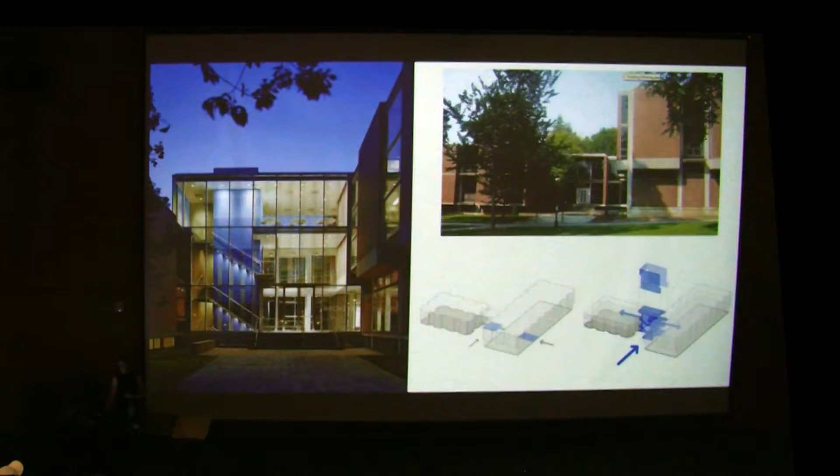This is the School of Architecture at Princeton, and projects in the public realm. This is a renovation addition to the North Pavilion at Union Square Park in Manhattan, New York.

We're committed to a belief that architecture is created out of a deep engagement with our clients and with the context in which their projects occur. The diversity in our work reflects that place, those people, and that client in those contexts.

On a scale of small and big, both in project types and also in terms of sustainability, is that stretch? It's okay, sorry, I'm just realizing the proportion is off.

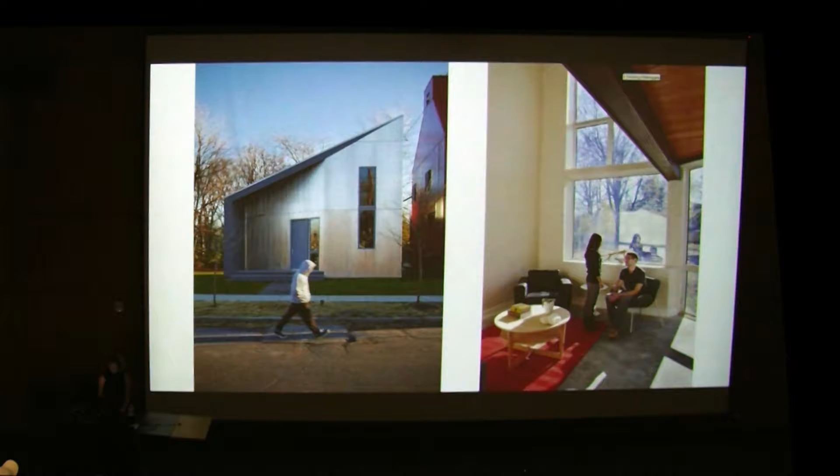This is a small passive house we did in Syracuse, New York. Certified passive house, $150,000 square foot budget, or budget for the whole project.

To sustainability at the scale of a city, this is a project we did in collaboration with dlandstudio for Rising Currents, an exhibit at the Museum of Modern Art called A New Urban Ground, about designing a new urban ecology and infrastructure to create a more resilient edge around Manhattan.

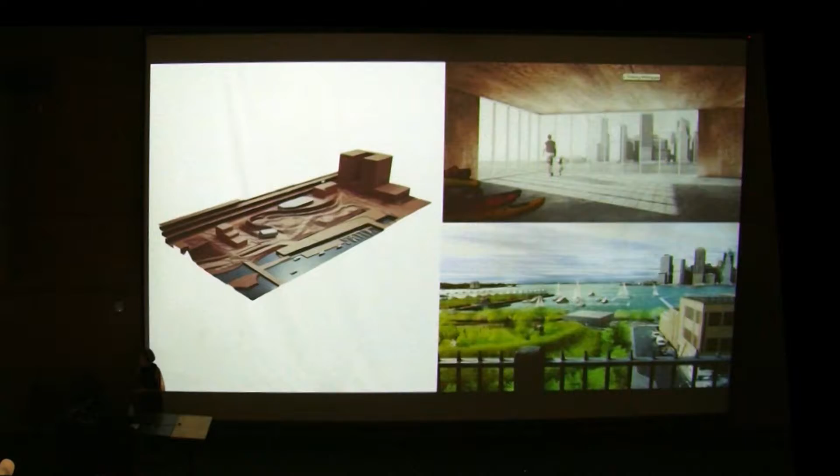Some current and recent projects in the office: this is a pavilion at Brooklyn Botanic Garden, and some other projects on the Brooklyn waterfront, maintenance and operations buildings for the park, and boat pavilions at both the north and south ends of Brooklyn Bridge Park. A foundation on the Upper East Side.

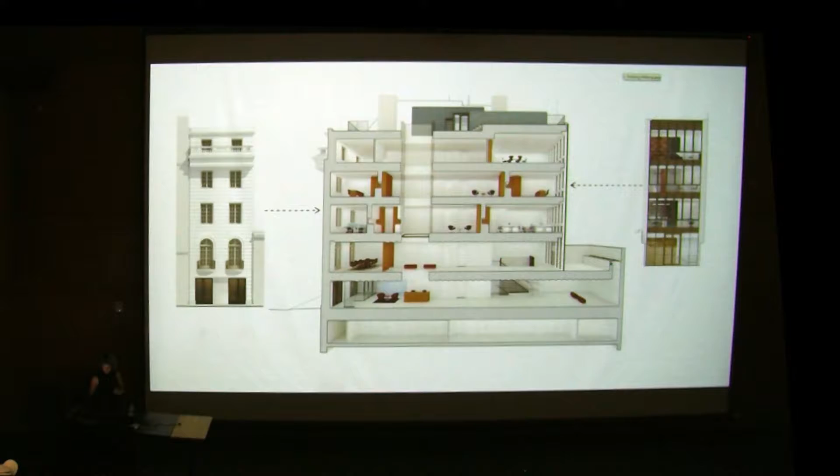This is a landmark townhouse, full-scale renovation of the outside and inside, and houses that we're doing from California to Connecticut right now in the office.

Across all of these project types, I think what unifies our work is our approach, our process, and how we engage each client and what we prioritize as themes. For us, that comes down to two categories: making and materiality, and a real love of exploring materials and the tectonics of creating things.

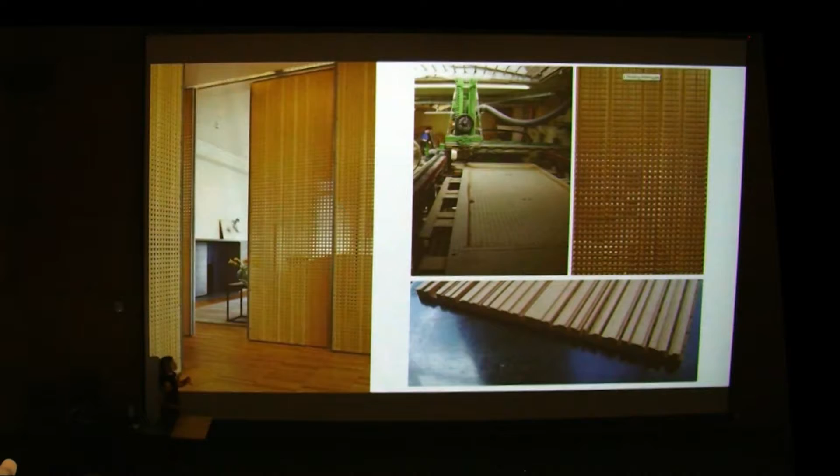That was an earlier study and a more recent screening we did a number of years back for a residential client. Then strategic thinking and planning for clients—in this instance at the scale of the building, basically planning the future of the building, whether it's programming or its evolution over time.

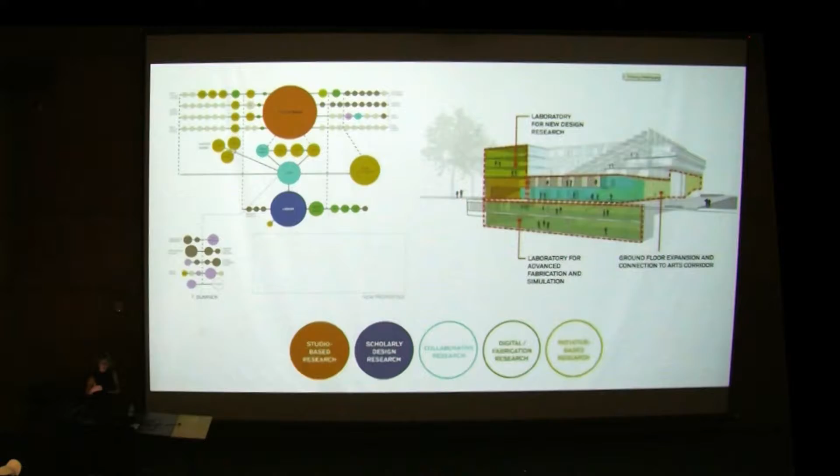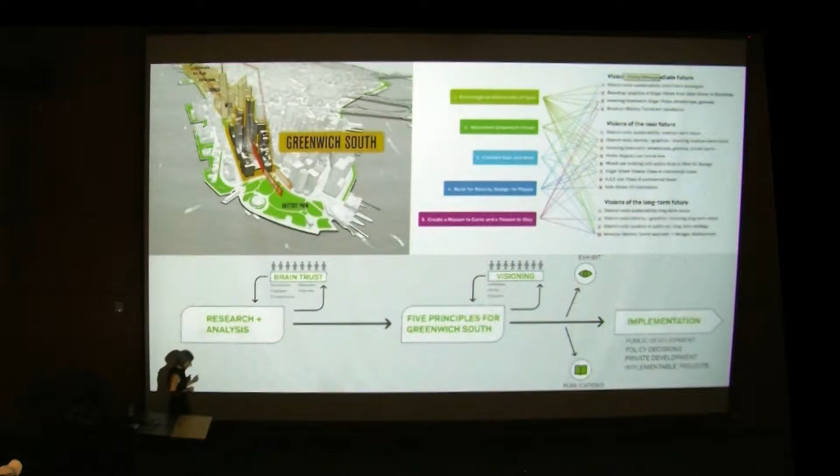This is part of a plan for Harvard's Graduate School of Design, or planning at the scale of the city. This is part of a strategic framework we did for the Alliance for Downtown New York, a business improvement district in Lower Manhattan.

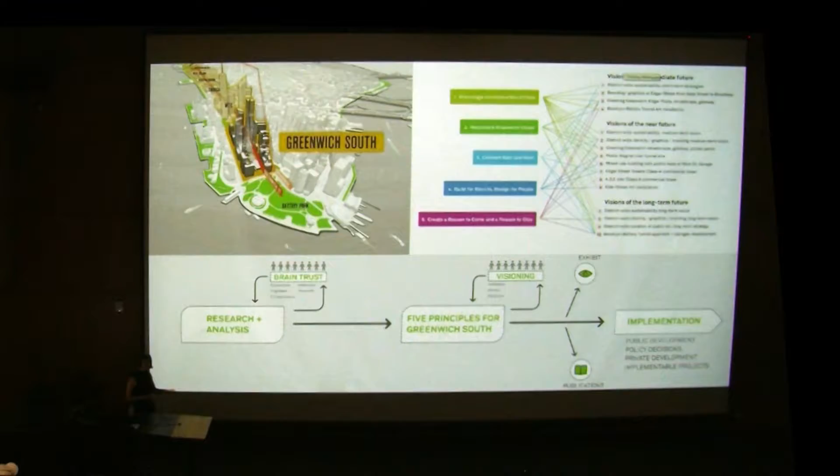That kind of love of making stuff, still making models and working in analog ways while using digital tools, and also really strategically thinking about what the goals are for a project and how we can make each project tailored and suited to its particular client.

So what I wanted to share with you today is a bunch of projects. I probably have way too many slides, so I'm going to go very fast. We talk about breadth and depth in the office, so this will probably be breadth and some depth, but I wanted to share it.

Some of these are very recent projects that haven't been professionally photographed yet, so you'll see some sad-looking photographs. I just wanted to warn you, but I wanted to structure it this way to show you a bunch of contrasts in scale and type of work and project, to show that diversity I was talking about.

To start, we did this project north of the city in Beacon, New York. It's an industrial waterfront that was a brownfield site, and our client was Scenic Hudson.

I love this project because it has these two essential pieces: the barn and the shed, or the barn and the boat pavilion. The site was reclaimed, and we worked with Reed Hildebrand, the landscape architect, who had been doing work on this site for some time.

Scenic Hudson's mission is, in part, to protect the viewshed of the Hudson River. They help conserve forest and property so that the viewshed to the Catskill Mountains is maintained.

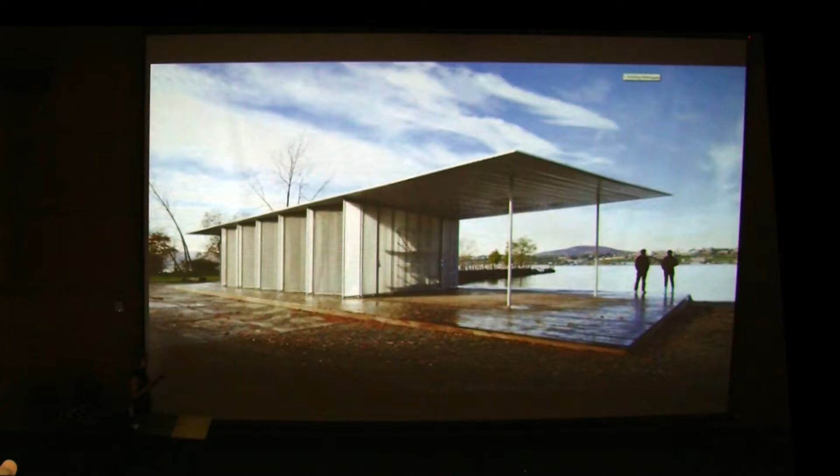So that kind of very utilitarian structure. As you move towards the water, the boat pavilion is situated in the landscape, among these beautiful berms that Reed Hildebrand proposed as part of the reclamation of the site. A very simple structure that celebrates this transition of land to sky and land to water, and frames our view of the horizon.

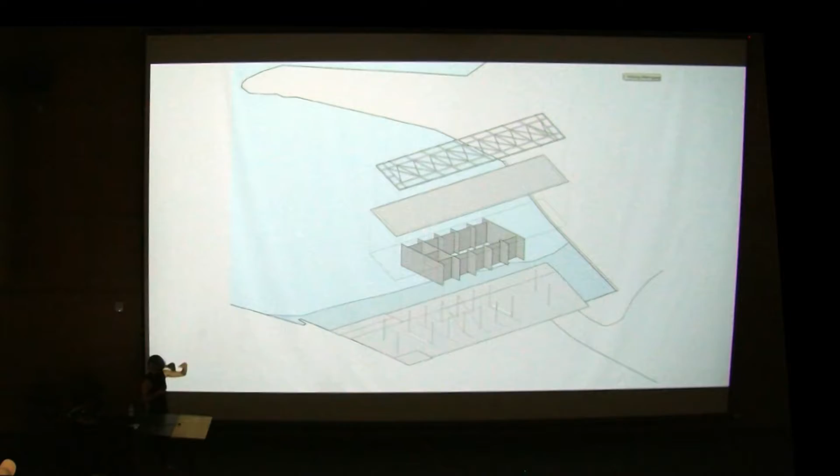So the structure literally is the deck. That deck or dock extends into the river and is the launching pad for all the boats. A very simple steel and aluminum structure for the housing or shed of the boats themselves, and then a roof structure that also has a PV array on top that powers the barn.

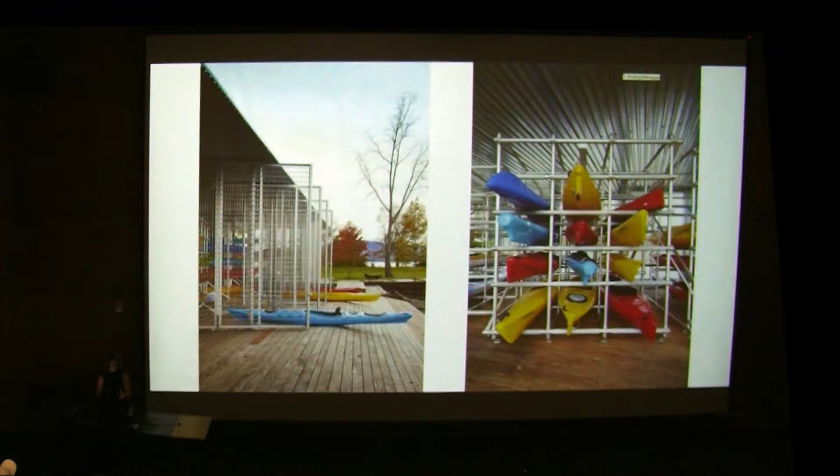So very simple structure that celebrates the boats. The boats are part of the display and part of the architecture. It's very utilitarian, and literally those boats get pulled out. The pipe rail is again part of the system and part of the architecture, and they launch directly out into the Hudson. So it's a very beautiful spot.

Two simple structures that I think also speak a little bit about a significant part of our work, which involves adaptive reuse and historic preservation because of the fact that we're based in New York. I guess that occurs in many other contexts too, but a significant part of our work is interiors work or restoration work. And so you'll see that in some of the examples that I showed today.

An interior, Knoll. We started working with Knoll a few years back. Knoll is, if you don't know, an iconic American design company focusing on furniture and textiles.

When we started our work with them, we began by looking back at Florence Knoll's own designs for showrooms for the company from the mid-century, some in California and in the Midwest, and trying to think about the ways that she used elements to separate out spaces in the showroom and to create an environment where the furniture could be displayed in alternative settings. So we were sort of inspired by her work.

When we started working with the company for their New York City showroom and flagship offices and design studios, we began by thinking about those simple techniques of how to break up the space and allow it to be occupied by the user making their way through this showroom, and to be flexible and adaptable for future displays and transformations. The other thing we realized is that the building - they moved from the meatpacking district in a massive industrial building to a corporate skyscraper in Midtown, right down the block from MoMA.

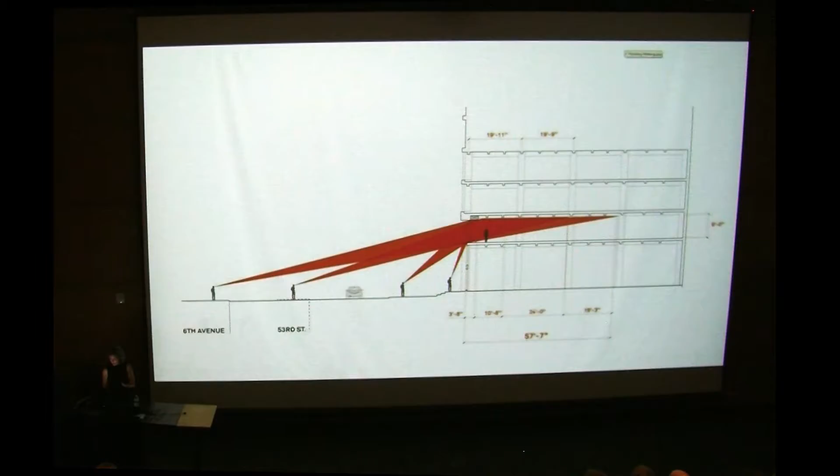We realized that a big opportunity was also the facade of the building, that we could brand the base of the skyscraper so that it announced the company's presence there, and also take advantage of the ceiling of the second floor, which is part of that kind of storefront display for the company. So really thinking about its relationship to its context and the fact that they were moving from an amazing space that was all in one story and had panoramic views of the Hudson River, to this Midtown skyscraper that didn't have the same kind of view opportunity, but had this really visceral connection to the street.

So the ability to stand in the showroom and feel like you're in the middle of Midtown and interacting with the cabs and the sort of life of the street, and to have that kind of life be aware of what's happening in the showroom.

So one of the other key components of this was mapping and thinking through the visitor's experience. How would someone who is shopping for furniture come through the space? How would a client come through the space? And how could we extend the realm of the showroom, which is on the second floor of their now three floors, up through the actual workspace of the company to the sales floors and the executive offices, which also has design studios.

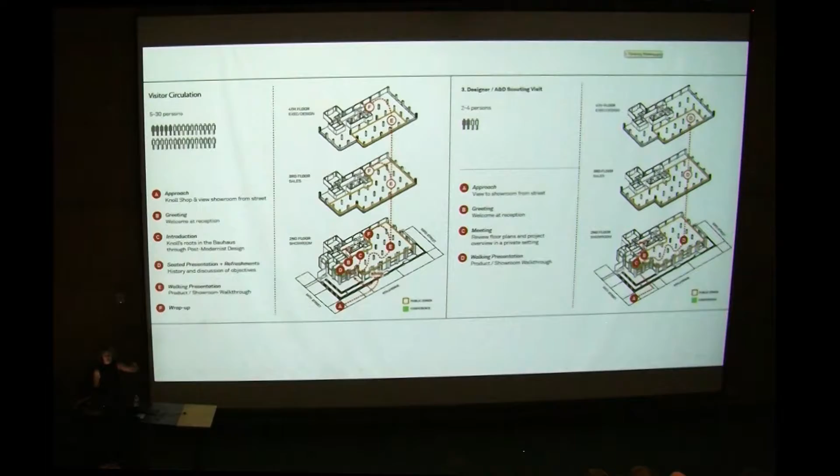So this was a project that was about mapping that experience and imagining ways that it could transform, and that people could visit, go through the showroom, and then go up into the office spaces and realize, I can see Knoll at work, I can see their products at work, I can understand how this could apply to my life.

So here, this is a sort of view of the exterior of the building. You can see we use this red curtain around the perimeter. That's a textile inspired by an Anni Albers textile that was in the Knoll archive, done in custom red, so that kind of defines the base of the skyscraper and announces the presence of the company.

And then we did the retail shop on the bottom. It's their first Knoll shop, which is an actual point-of-purchase sale opportunity for the public.

When visitors go up to the second floor to the showroom, they're greeted with this timeline, which we did in collaboration with Project Projects. We love to collaborate with people, working with brand and landscape architects and different designers, and we learn a lot from the people we work with, both in the studio and with specialists who help get buildings done. In this instance, Project Projects did the wayfinding and graphics for the space, but also created this great installation to tell the story of the company and give them the opportunity to put up new exhibitry to explain and launch product or tell new histories to visitors.

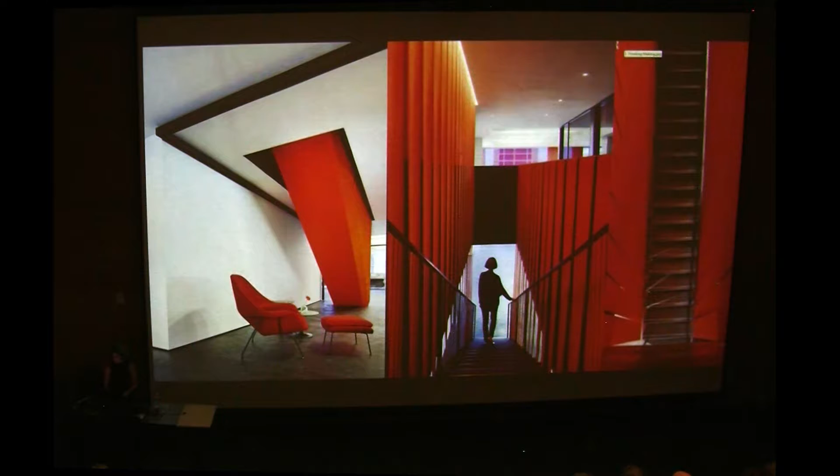And actually shorten the distance, even though it's vertical distance, of traveling from one office to another if you're working with someone in the company. So the stair became a device for promoting their own work culture and also an opportunity for displaying fabric - here, felt, and then the second stair, which connects the 3rd and 4th floors, the sales and executive floors, clad in leather.

And then additional architectural applications of the material - this is felt done in a corrugated pattern in a number of the phone booths, and we did felt and leather in different places, as well as the drapery pieces you saw.

This is a view of the 3rd floor sales floor - you can see the red Anni Albers. On the 3rd floor it's one big open plan, and the center has communal spaces, the phone booths, conference rooms, some offices. The sales team and marketing team sit out here in the workspace.

When you get up to the 4th floor, the plan inverts. We pull to the perimeter the executive offices and design studios, because the designers really need that daylight - the textile designers need daylight from the outside. And then we borrow daylight and bring it to the center, which is a kind of gallery space for archival furniture pieces. You can see some of the textile and drapery we used to layer on that interior glass.

And then back down to the ground floor, this is just a detail of the shop. The shop is very small and doesn't connect up directly to the 2nd floor, so when you visit you have to go into the building lobby and then go up. But it's a really nice moment because the public can just go in without their architect, which is good sometimes.

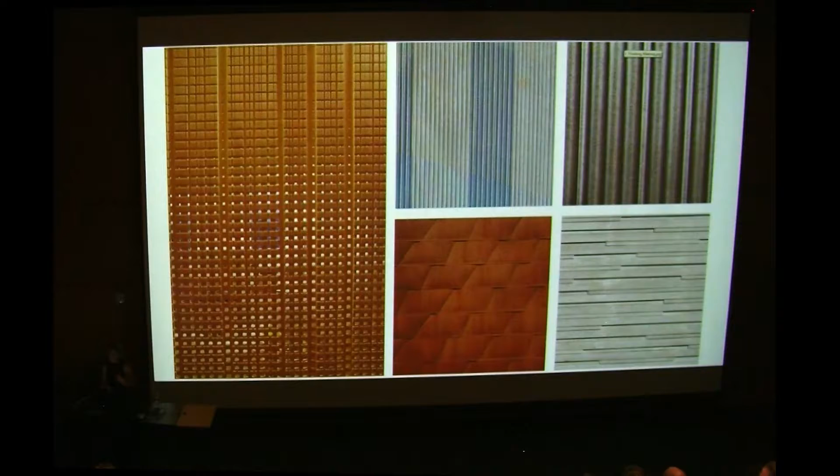More felt than leather, because San Francisco is not really a leather market, that's what we heard, and wall covering and glass. Out of those collaborations, we started this conversation with Knoll about launching a product line, informed by our own interest in texture, pattern, and surfaces.

That product line launched a couple of years ago, and it's a mouthful - it's called the Architecture Research Office Collection. It basically took those ideas of creating architectural finishes, and we released these high-performing acoustic architectural finishes, primarily in felt. This year we're launching some of the designs in leather.

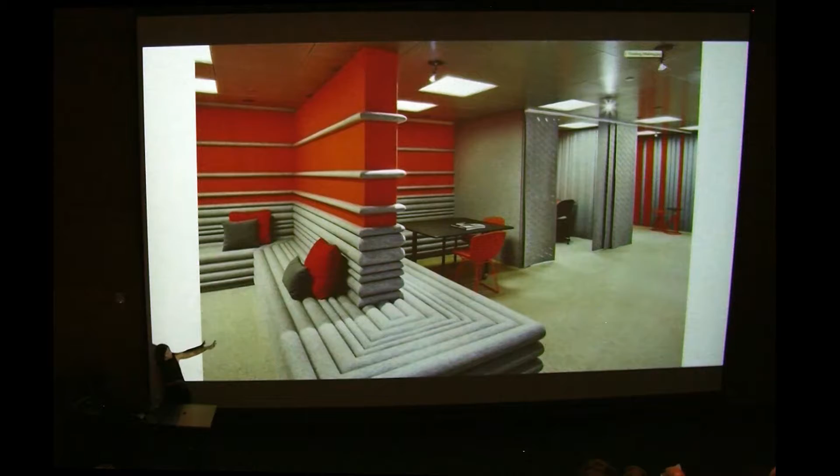So this is just a detail of the Knoll showroom in Chicago that shows plank configurations, which can be vertical or in a bench configuration like this, and some of the perforated screens. We also updated it for leather - on the right-hand side, you can see leather here.

So these are faced with felt and leather, but have different acoustic substrates, so they're very absorptive, and then have this very luxurious outer finish. It's just a detail. And they're modular, so you can basically plug them in different configurations.

So this has been fun. Working with Knoll is like having a little affair with the company, but it's this great experience of continuing to engage them, and they have an amazing team, and we love working with them.

So this is one of our screens. And this is a little shot from Houston - we're just finishing the Houston showroom right now. You can see at the ceiling there are white baffles, another acoustic product we launched, kind of acoustic baffles for open ceiling applications. We're using those in Houston. They're just moving in shortly.

So back to the Bronx, or back to New York. We started a couple years ago a project for Riverdale Country School, which is a private school in the Riverdale neighborhood of the Bronx. It's the first time we've worked with a lower school instead of higher education or a college or university. They have this beautiful site on the east side of the Hudson River, which is in a protected special natural area district because of the rock, foliage, and trees in the area.

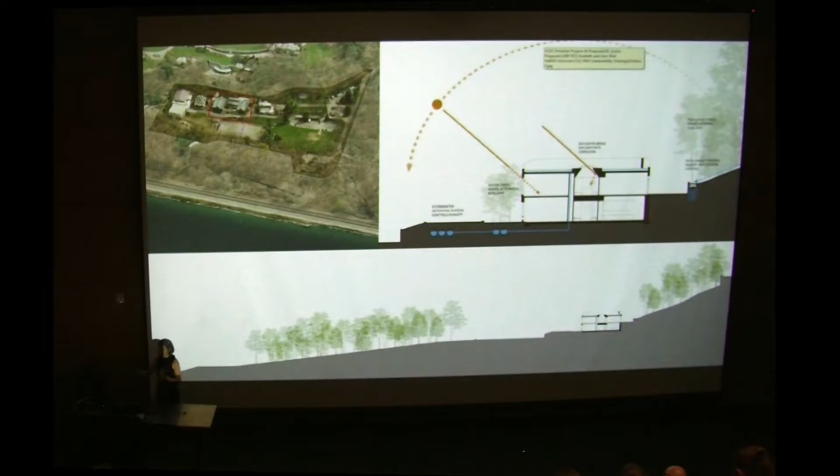So for this client, the charge was how to create a great academic building that reflects the pedagogy of the school, how do we allow the students the opportunity to engage their environment. This school is amazing because they have all these buildings strung along the line, and the kids go in and out, so they don't stay in their homeroom. If they have Spanish class or dance class or art class, they go outside to a different building, much like you would on a campus, even though they're little, younger kids.

So the site plan, because it's along that hill, all the buildings are strung along a row, and the senior and junior buildings are actually historic homes. The site is one parcel of what used to be a much larger estate many years ago, and it has since been divided up. So this piece belongs to the school, but has these historic homes which are now repurposed as academic buildings.

Our building is the new purpose-built building. We replaced a building that was really dysfunctional on the same site, and basically continue this line of buildings in a row on one edge of the site, with the hill behind, and then the fields and the river down below.

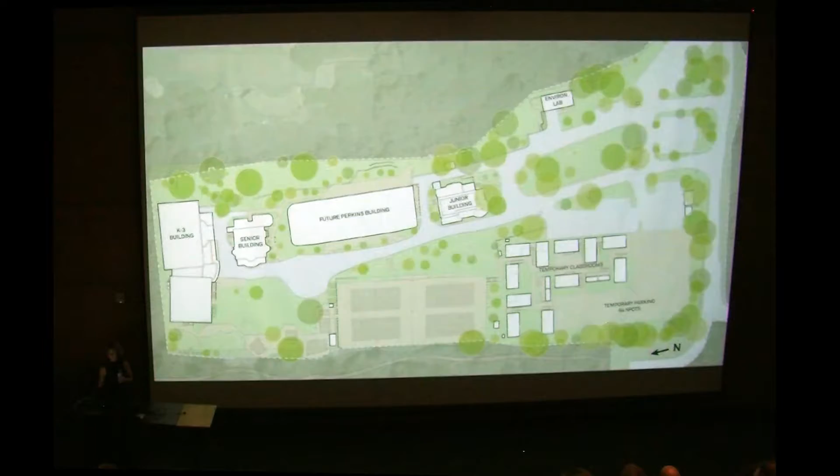You can see here this whole complex. I'll come back to that in a second, but those are temporary classrooms that we just opened.

In starting this project, we looked at the whole campus and asked how you organize your kids, pre-K through 5. Where do they learn? What kind of spaces do they need? We realized it would be really beneficial for the school and the buildings to reorganize everybody. So instead of just doing one building, we touched many, creating in their other large academic building a pre-K through 2nd grade area, which becomes an early learning center. The new Perkins building will have classrooms for 3rd, 4th, and 5th graders, plus a multipurpose theater and student-centered spaces, so kids and faculty can be dedicated to their individual spaces while still having other spaces on campus to collaborate.

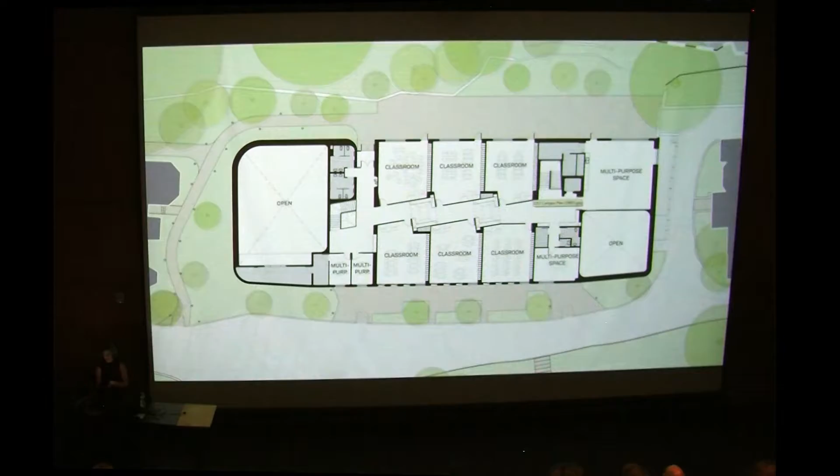In the commons space, all the surfaces are workable surfaces, so they're tackable walls, writable walls. The idea is that kids will break out and do independent work. On the upper floor of those commons, there are skylights that animate that hallway. The hallway strings the classrooms together, and then there's a stair at both the north and south ends, right next to the theater and student center hubs.

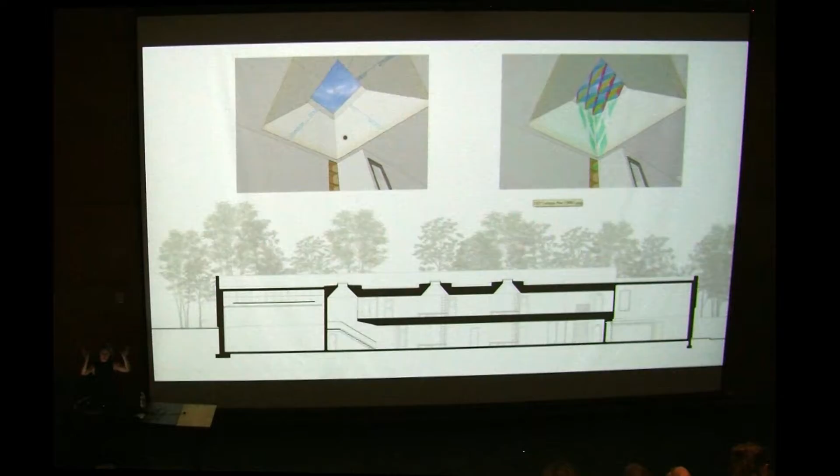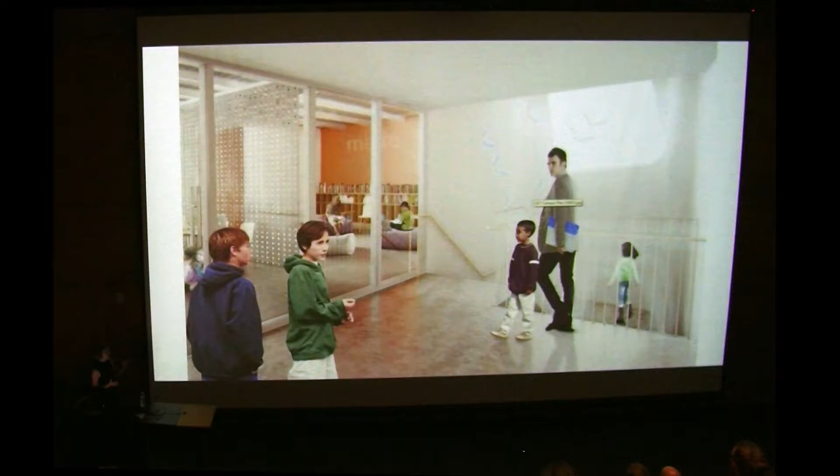That shows you the section with 3 of the 4 skylights. We're doing these installations to create like a sundial and prisms so that there's daylight and color that will change over the course of the day and over the course of the year. Those installations will animate the skylight spaces. In this instance, we're mapping kind of a solar path, again using graphics that Scott worked on, so that the architecture really speaks to the environmental conditions that the building exists in.

The learning complex is this little village of trailers that opened like 2 weeks ago. To do the building, we took a whole building that they use right now and demolished it, which was hard. The 3rd, 4th, and 5th grade, so 9 classrooms, are living in trailers for 1 year.

For this project, we took that same concept and said, okay, the commons is really important. We have this cluster of trailers, let's generate a site plan that creates that common space or those core communal spaces on the outside of the trailers and gather the grades by group. They wanted to encourage grade identity, so that the 3rd graders felt like 3rd graders, and the classrooms were near each other, that teachers working with the same type of curriculum were near each other. So we took that commons concept and applied it to the learning complex, which I think is a very funny name, but the headmaster came up with it.

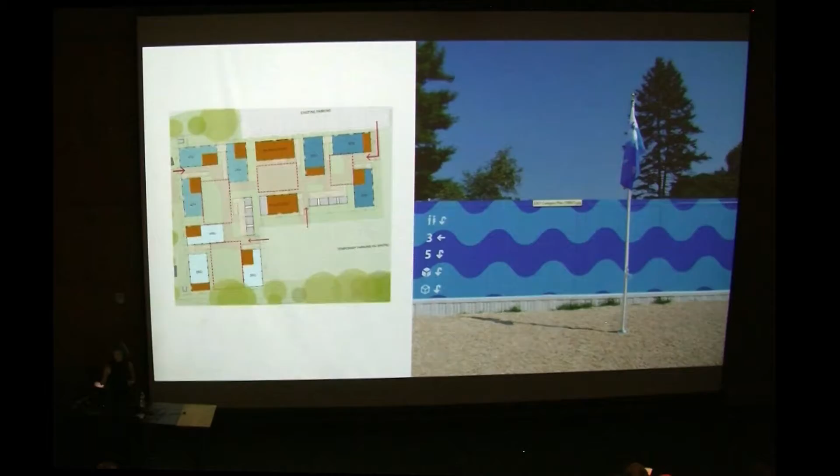This just opened, and Scott's concept also is that this was sort of a campsite for the students. He actually rolled out this whole program working with faculty and students where they created a menu of graphics, logos, and icons and let the students vote, so that the 3rd graders had their color palette, their pattern, their logo, and those patterns and colors become the kind of wallpaper or the facades of the buildings.

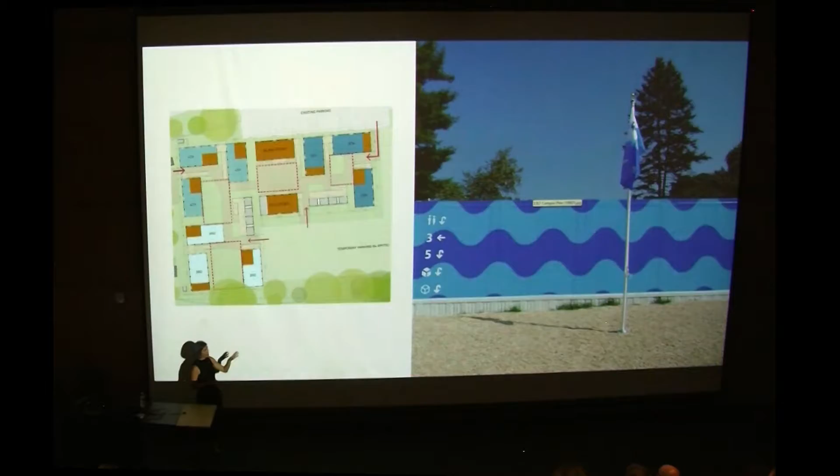So everybody loves it. I'm very afraid now that they're not going to like the building as much as they like the trailers, so we're having a little bit of anxiety about that. But it's been very well received. They're going to be walking through these spaces through the winter, so we'll see how it goes. But it's been a fun project. It's a temporary project, 1 year of construction. By next fall, the new building will be done, and these will be gone, and this will be returned to an athletic kind of playing field.

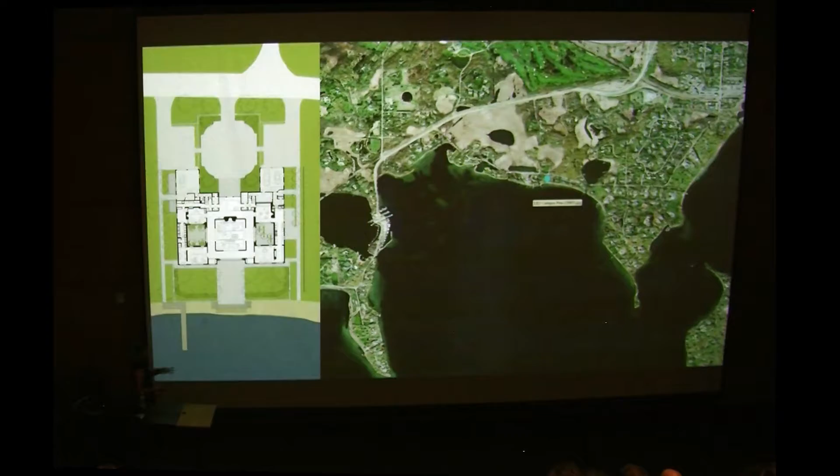We've worked with this client for many years on different projects, so we were tasked with transforming this house to support their lifestyle and their art collection.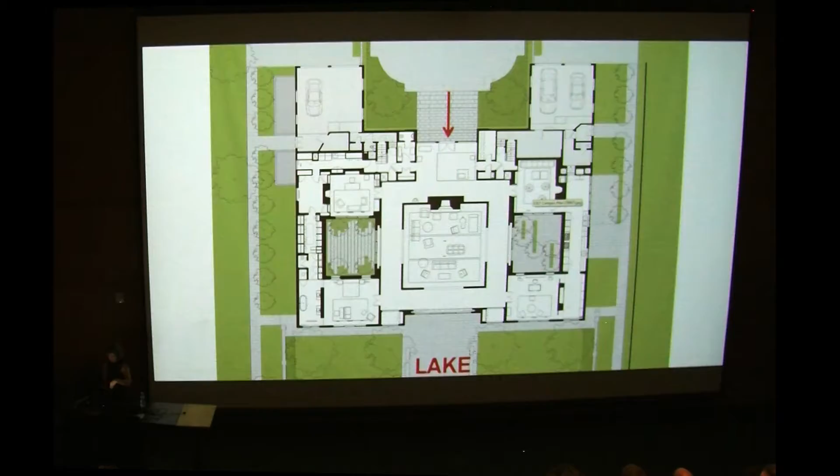We didn't really touch the plan. The plan is great, it's perfectly symmetrical, with two courtyards in the middle, one on the land side and one on the lake side, and a gallery space with the main living room in the middle that has a glazed skylight, plus four spaces that surround the courtyards.

The two rooms on the land side we wanted to make really intense, rich material interiors - one is a family room and one is a library or study. The two on the lake side we wanted to be really bright and light-filled, more about looking at the lake than thinking about the room.

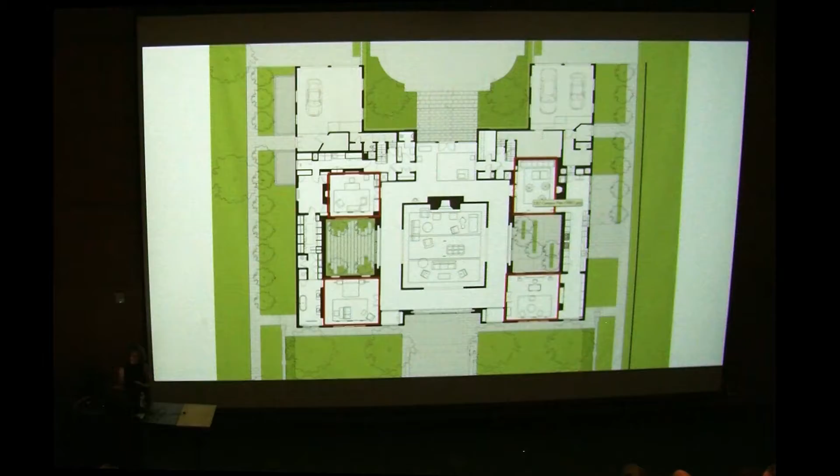I wanted to share some of these photos - this is fairly recently completed. This is the gallery space. The house also has 14-foot ceilings on the inside, so it's one story, like this crazy house, with really high ceilings. It's great, the space was great.

Obviously it was a major renovation. Here you can see that center living room space, the glazed skylight at the ceiling, and views and glimpses to the gardens.

We worked with Shane Cohen on the landscape design. A view of that middle space and fireplaces - pretty quiet architecture as a backdrop for their collection of beautiful things, with views to the gardens.

The gardens have water features on the right - you can see a little water rippling down the limestone, just for a little sound and to reflect light. And then these more intense, materially rich interiors.

This is the family room, with details, millwork, lacquer, bronze, and little tweaks - like taking the millwork panel here, you can see that it's asymmetrical. So playing a bit with some of the traditional details because of the classical plan in the house, and changing them.

That's a view out towards the lake, and these brighter lakeside rooms. Views of the gallery spaces terminate with windows that look out towards the water.

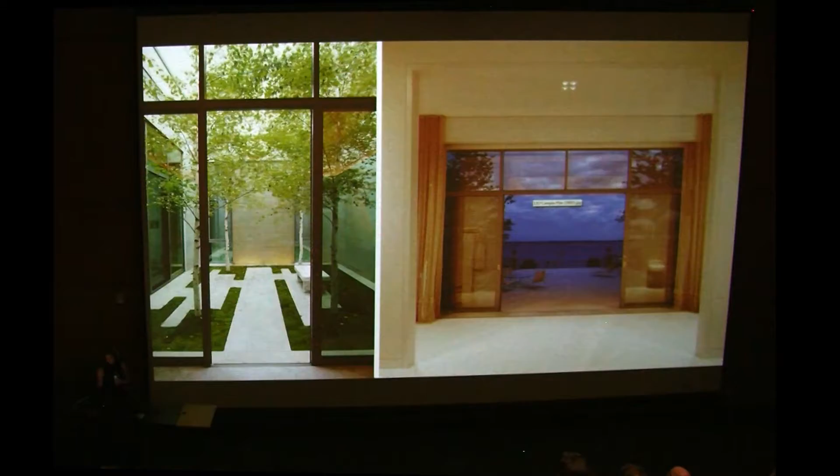Very different project - Brown University. We've done a lot of projects for Brown, and just finished - these pictures are going to be really bad, so I apologize - a new building, a little 3-story office building for the applied mathematics department.

We've done work with some of the mathematicians at Brown before, and they're currently housed in this house on the left, a Richardson Romanesque, massive, beautiful old home. Our building is actually an enabling project for a much larger engineering building that Kieran Timberlake is doing further up on the quad.

We completed this project very quickly, our first design-build project. We were a sub-consultant to the contractor, but it's a contractor we'd worked with, and really Brown is the one controlling everybody in this scenario, so it's all about making the university happy.

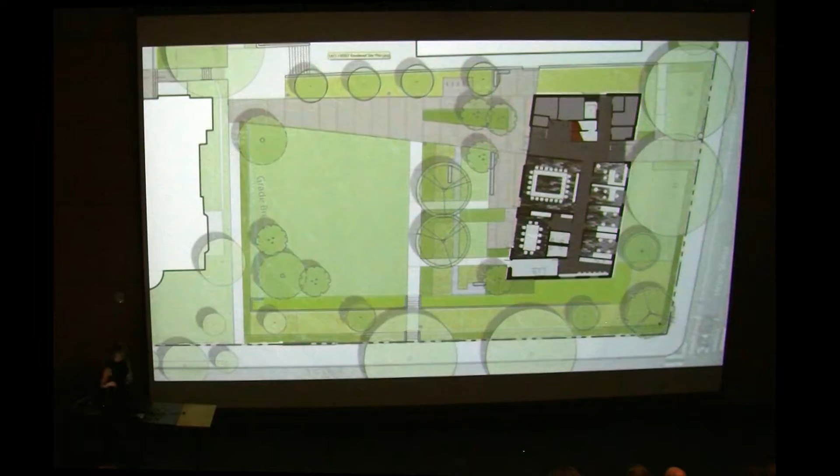Our project is a simple building, and the mathematicians will move into it. They'll then have these two sides of the green, and where they're housed now, the little buildings they're in are going to be removed to make space for this new building - that's just starting now.

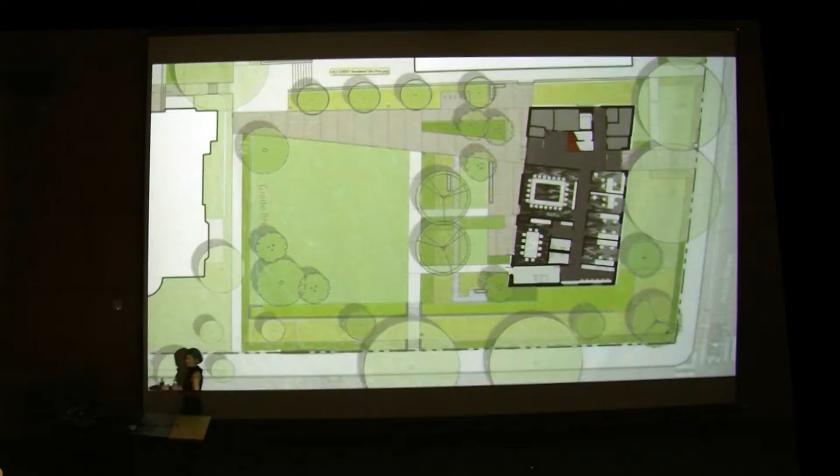The building is for faculty, doctoral candidates, and graduate students - a very quiet, studious bunch of mathematicians. They're pretty reserved, and it's really a little office building.

There's office spaces around the perimeter, and then central eddy spaces for collaborative work on the second and third floors. In those eddy spaces, we have writable walls - they like chalk.

The mass of the building was one of the challenges because it's on this prominent campus corner, adjacent to a beautiful historic street of residential homes that aren't part of campus. Providence has a lot of beautiful old architecture, so our building had to navigate these two scales, institutional to residential, situating itself in a way that still announced the university but felt okay on the scale of the street.

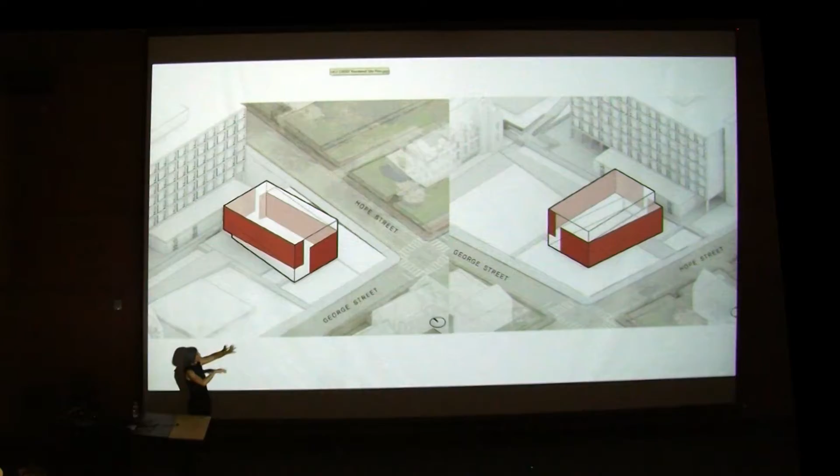This plywood massing helped us do that by shifting the volume of the building. On the street side, the Hope Street side, it pulls back so that it breaks down the scale, kind of like a mansard roof would do. On the green side, it announces itself towards the green and creates a covered area for outdoor work, outdoor calculating.

A big part of our project here was thinking about what the building would look like, what its material should be, what it would be clad in. We gravitated towards a richer material palette and color, but not brick, because there are like 20 kinds of brick on the block, plus paint and all these houses in lots of different colors of brick. So we felt a deep red was appropriate, but that brick would be the wrong direction.

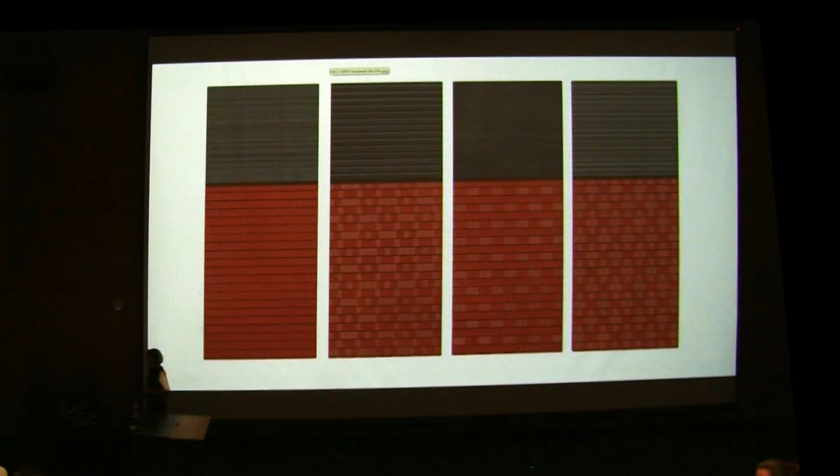So we started by looking at terracotta. These are studies of terracotta shingles, and these are studies of more shingles. We like to do pattern studies.

And then we ended up going back to Corten steel. Good old Corten steel, like Telluride House, three shingle overlap. The shingles overlap and the pattern shifts, so it's hard to tell from these shots, but when you look at the facade from one side or the other, the pattern reads differently because of the shadow on the surface.

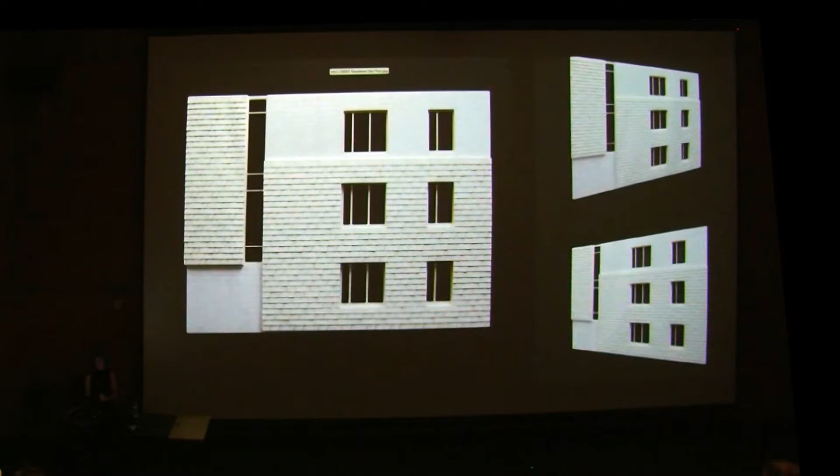This was a very hard process to get to this point. But the great thing is that the Corten has this really deep color, and it's beautiful with all the brick, but it's crisp, it's modern, it's not historic.

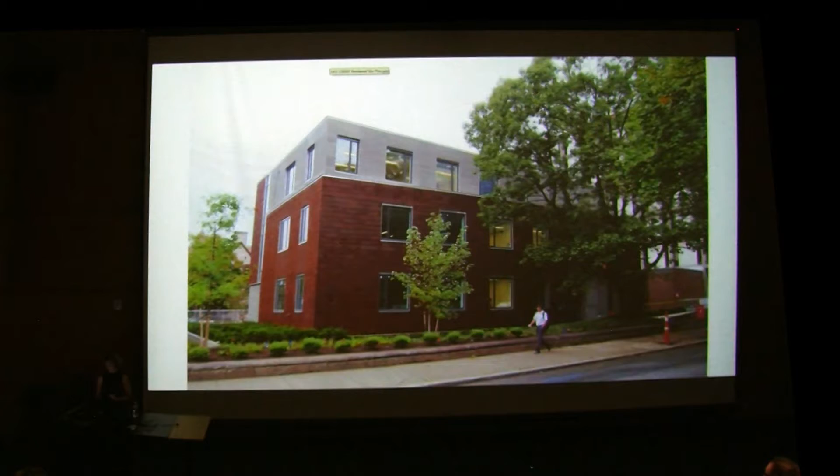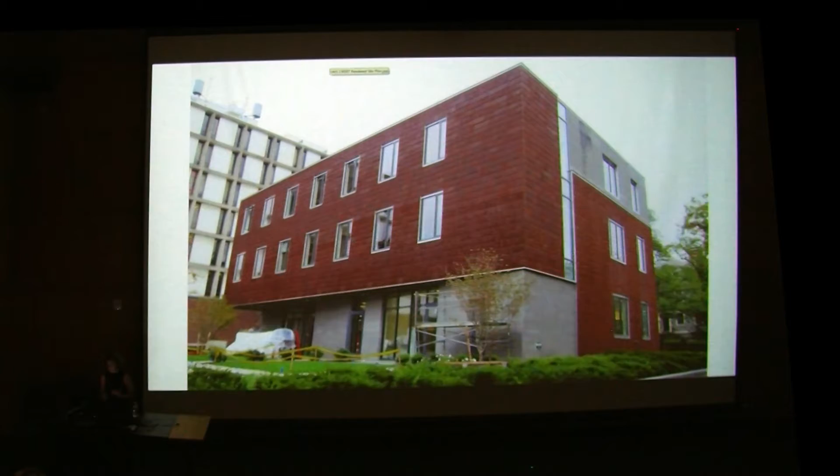This is a recent shot. They just moved in, so we're going to photograph this soon. It's a shot from our project director, taken from the street side. There's cast, corrugated cast stone that's gray, and from the green side it's a little bit of a utilitarian office building. This gives you a sense of what the shingles are like.

On the inside, the floor plan has these—again, these are construction shots, so very rough, but I'm excited about these new things and wanted to share them. There are two stairs, a north stair and a south stair, a front stair and a back stair. It's kind of like a house, but it's an office building.

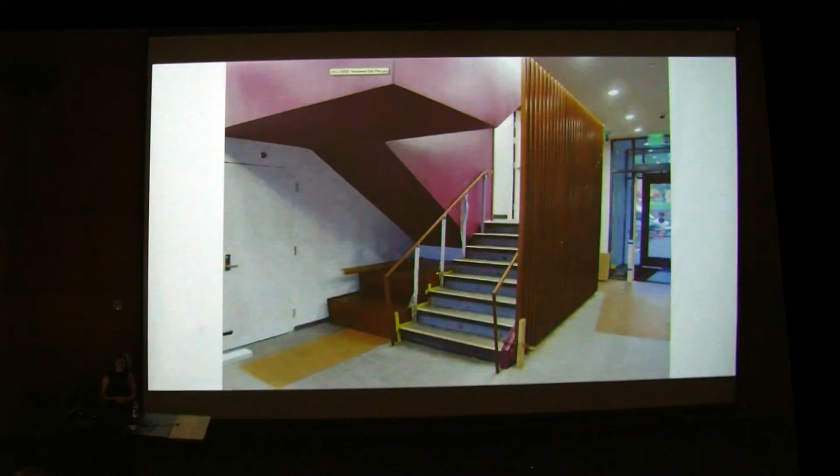This is the front stair, connecting to the lobby space. The lobby opens to the green on one side and to the street on the other. As you go up, you come out onto these eddy spaces, collaborative breakout spaces off the perimeter offices. This is a rendering, with writable walls in different colors.

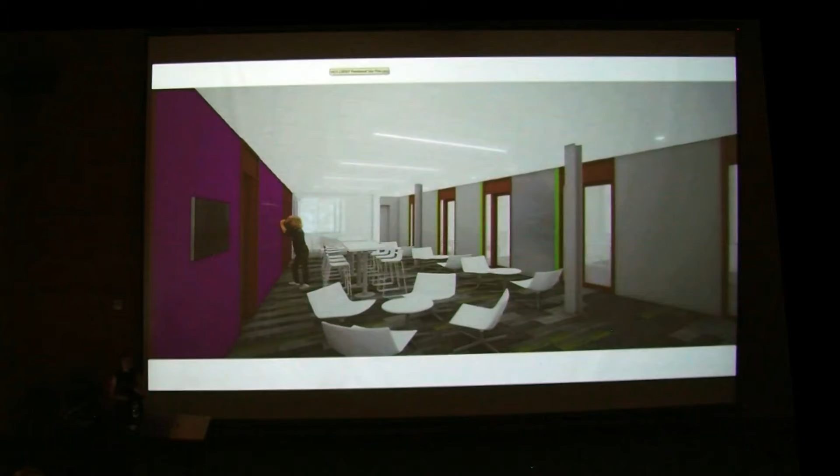Judd. So they're a different client, very different project. We started a project a number of years ago for the Judd Foundation, which is based in New York. Donald Judd, amazing, great minimalist artist, purchased this...

cast iron building in Soho in 1968 and lived and worked in this building until his death in 1994. He purchased this building and worked here before he also started his residence and studios in Marfa. So this is sort of where he began some of his thinking about art in place, and then continued to...

use this as his New York City base, as well as obviously working on Marfa. So this project I wanted to include because this project is everything about Judd and says very little about ARO, other than how we approach work for a client like this. This project is one that is about orchestrating a complex team of specialists to allow the Judd Foundation to reopen...

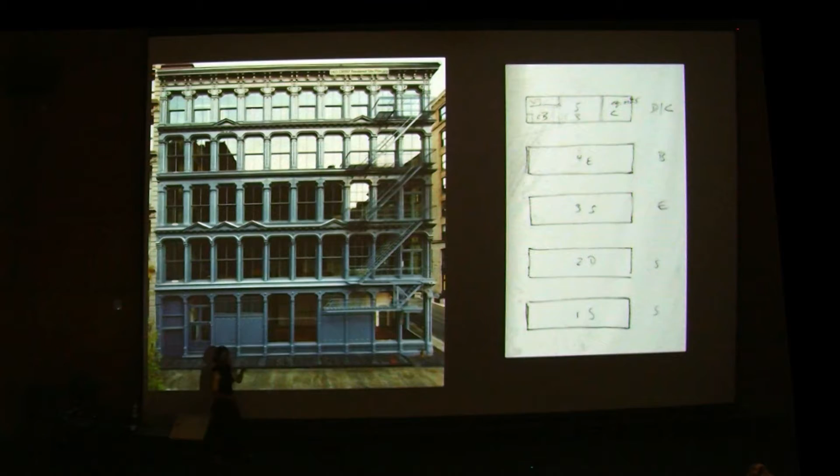They don't change. So our role here—this is an early Judd sketch, but it speaks to the programmatic zoning of the building. Like every floor has a different function: studio, kitchen and dining, bedroom, and they're all broken out by use. So our project, we really were the lead, and a design lead...

mostly from the standpoint of making smart judgment calls about how to transform the building in a way where the architecture, his vision of the architecture, is what's dominant, and everything else is subsumed to that purpose. So we work with an amazing historic preservationist architect in New York called Walter Melvin, and they took apart...

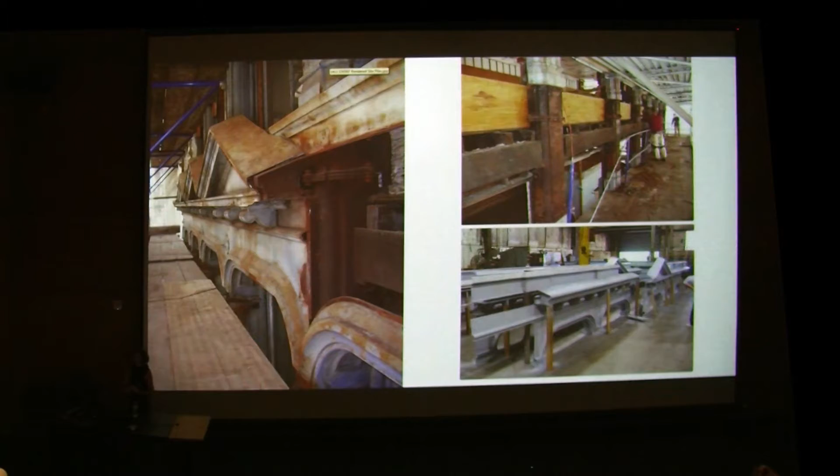we took the whole cast iron facade, which is a structural facade, apart—like 1,300 pieces that shipped to North Carolina. 430 pieces were recreated. All of them were restored in North Carolina and then shipped back to New York City and reassembled. So basically the whole building was taken apart and then put back together.

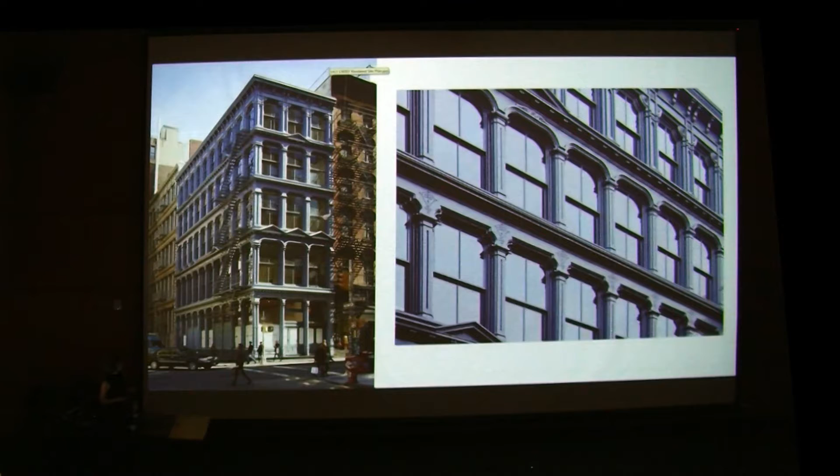It was reglazed. We had to go to Landmarks and make a pitch for saying that the building should be painted this color. This is Judd's color for the building, but it's not the historic color, obviously, for a cast iron building. So a lot of kind of technical machinations to allow the project to kind of come to fruition.

Below grade, the Judd Foundation already had their office spaces in the basement and sub-basement of the building. So this is just a great shot that shows how those amazing glazed sidewalks work in Soho, and how light can come all the way from that top corner down through multiple floors of the basement.

But we did renovate down here, so this is more maybe us than Judd, but he had storage spaces that used the plywood at the lower level already, and Judd Foundation has their offices there now. So these are just some details of that little bit of our work.

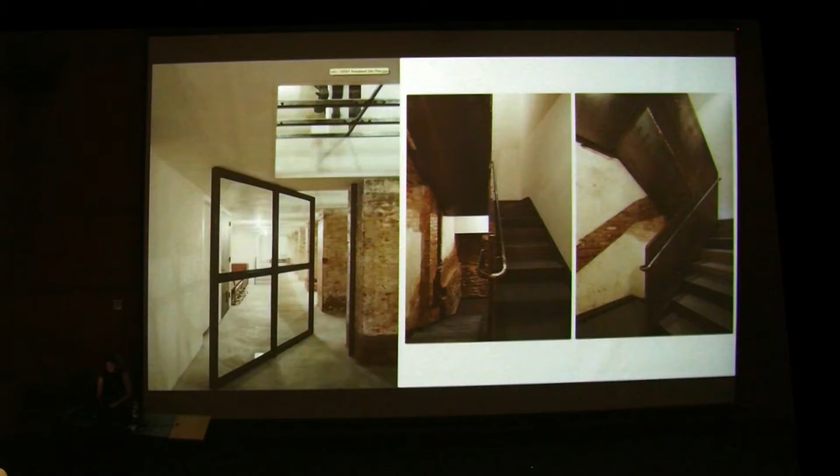Sorry, I'm going to go quickly because that's going on, and the stair, and then upstairs at the ground floor, you can sort of see really what it's like now, which is untouched, but it was actually radically touched. So that's sort of the point.

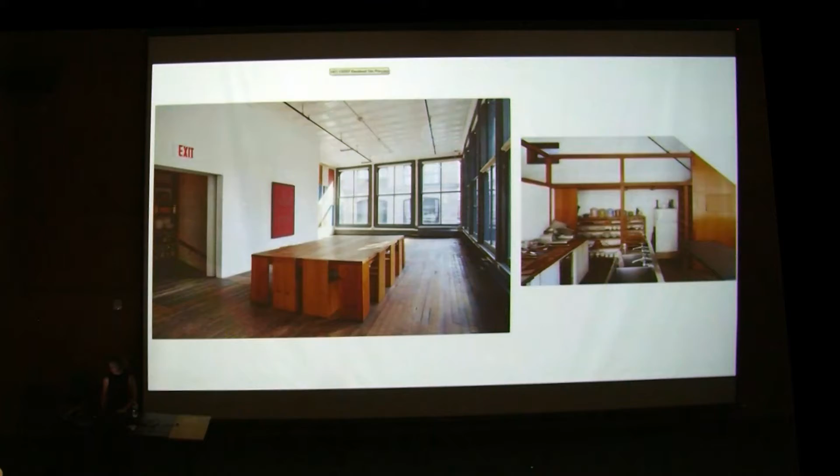But a really kind of amazing space to visit. You can schedule a time and go see it. This is the dining and kitchen floor. These amazing, fully glazed facade, which is really tremendous.

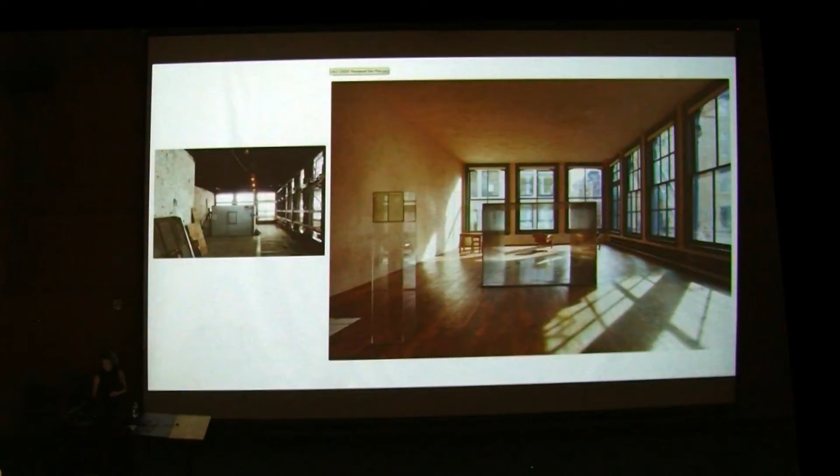And then some pieces of art, like this sculpture you can see on the left—all the construction happened around it. So some sculpture was left in place, some murals were left in place during construction and protected, then unprotected. And then this is just a detail that shows like there are always little sensors, very, very tiny sensors...

for temperature and smoke that we had to integrate again so that the public could come into the building. So trying to allow certain things like exit signage to exist in our best ability without detracting from the interior.

This is a detail about the staircase. He had this vision for an open stair. You can't really have an open fire stair in a building like this.

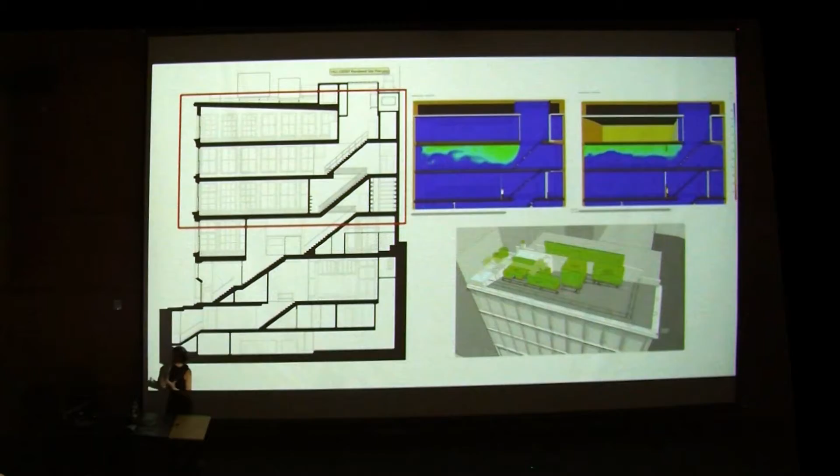So we worked with Eric, who did a computational fluid dynamic model to show smoke activity in the building, which you can see on the upper right, so that we could make a case to the fire department that we could use baffles tied into the fire alarm system to control smoke so that the stairs could stay open. So all of these sort of behind-the-scenes efforts—this is a detail of that baffle—allow the building to kind of exist as much as possible and as close as possible to Judd's vision for it.

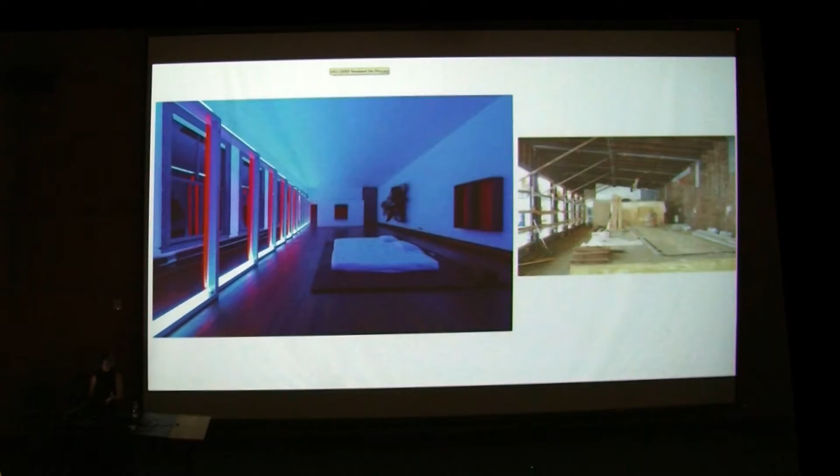This is a Flavin piece that was custom designed for this site by Dan Flavin, and it's actually wired into our egress lighting. So in an emergency, it is exit lighting for the floor, which is our most expensive exit light we've ever done. But there's no other lighting in the space. It was really important that we didn't add exit lights to this space because it's beautiful the way it is. This shows the construction, some details there.

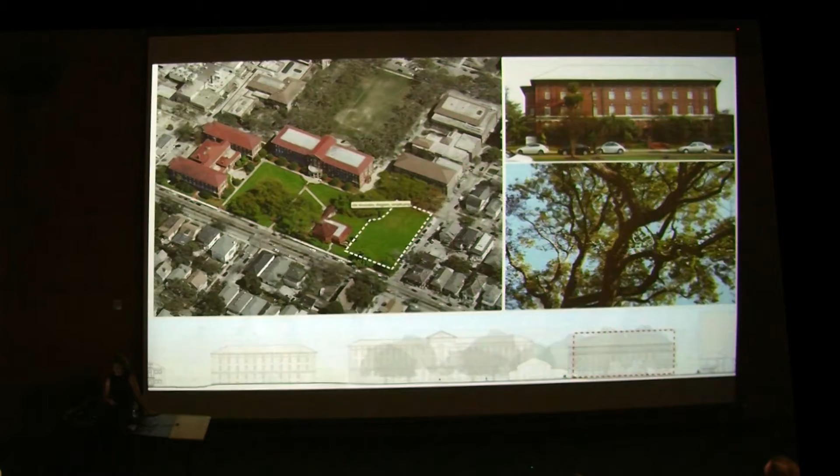At Tulane, I have a couple more projects to share. We did a residential college at the Newcomb College portion of the campus, originally designed by James Gamble Rogers. This building is about tying into the residential college system, fitting into the context of a historic college campus, campus corner and residential context, and dealing with site constraints. We had a chapel done in the 60s, very poorly sited, that we couldn't move, and these tremendous, huge, beautiful live oak trees that we needed to protect.

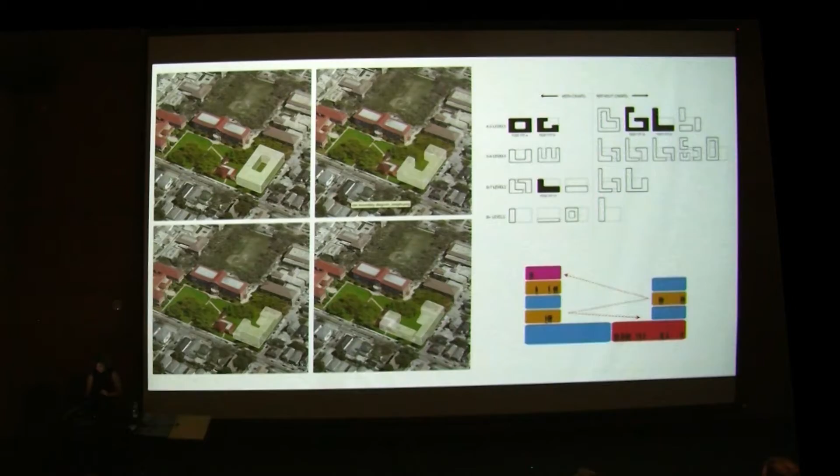So much of our work here was about trying to figure out how to fit 256 beds for the dormitory on this little site without hurting the chapel and without hurting the trees. For a while we flirted with moving the chapel, but that wasn't possible. This is a diagram about all the programming pieces of the residential college—the first purpose-built residence hall as part of the residential college system the school has been rolling out. That means dormitories are clustered together with faculty in residence, and the building includes housing, but also private apartments, social spaces, and communal classroom and teaching spaces for students who don't live there.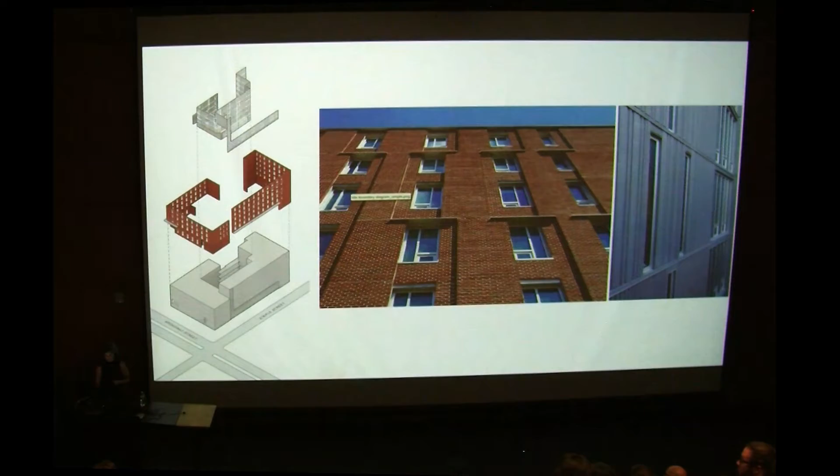That model allowed us—these are views of the common spaces on the ground floor—to also use it in terms of our material choices. On the outside, we clad the building in brick to create a wrapper that was contextual and appropriate for the James Gamble Rogers plan. He had always planned for another building on this side of the quadrangle, so we wanted to choose a brick that matched the buildings on the other side of the lawn. Then a zinc interior, zinc glass for the center of the courtyard, so something kind of crisp and bright, but muted, for the center courtyard space.

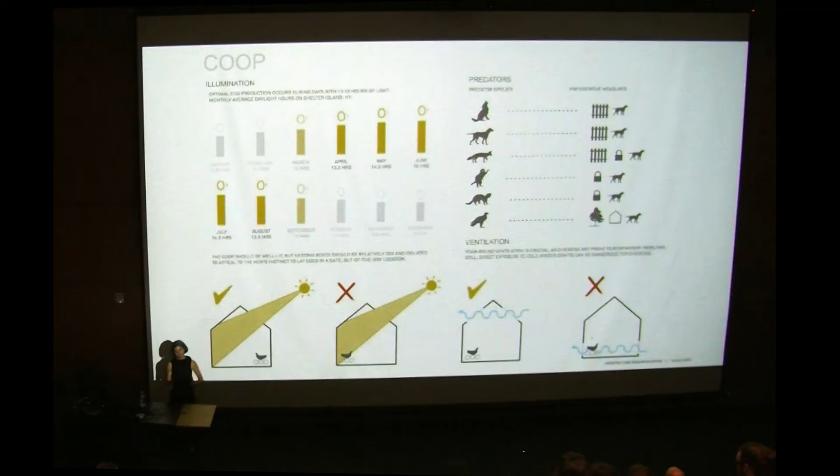Okay, very little, different scale—house. We did this great chicken coop for a client on Shelter Island. Best chickens ever, I guess—they're very well taken care of. We diagrammed and thought about all the things you need for a chicken coop: how do you create optimal egg production, what temperature, is it direct light or indirect light, is there passive ventilation, how do you cool them, how do you protect them from predators, and what are the different breeds we're going to house here. What is our precedent research?

So this is like in a nutshell—we do this for every project. We look at the precedents, the program, the environmental requirements, and we did it for this project. So this encapsulates a little bit of our approach. What are the components of the coop? Scratch and grit and dust baths, manure—so it's about organization and plan, and thinking about what's the essence of the building, this little shed.

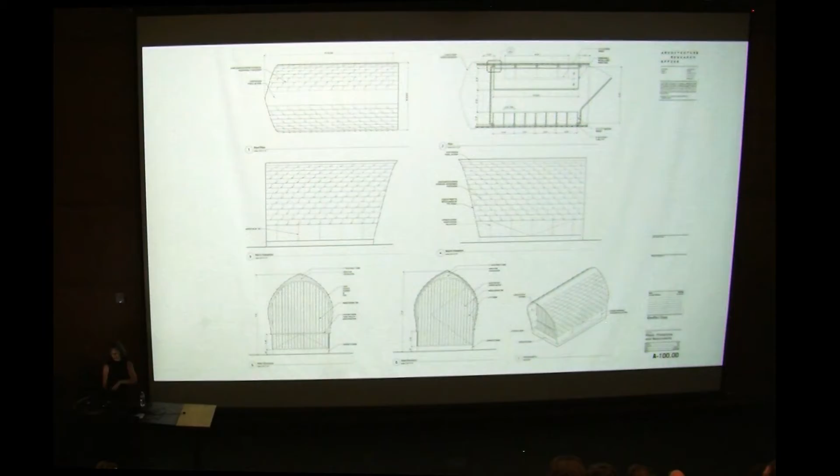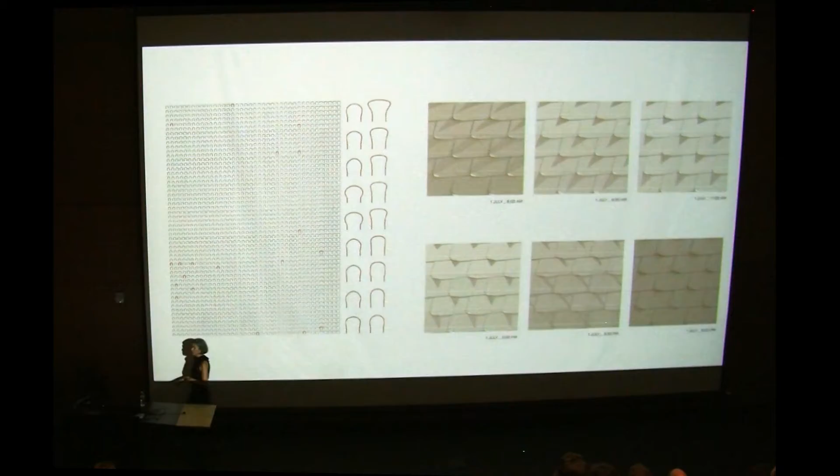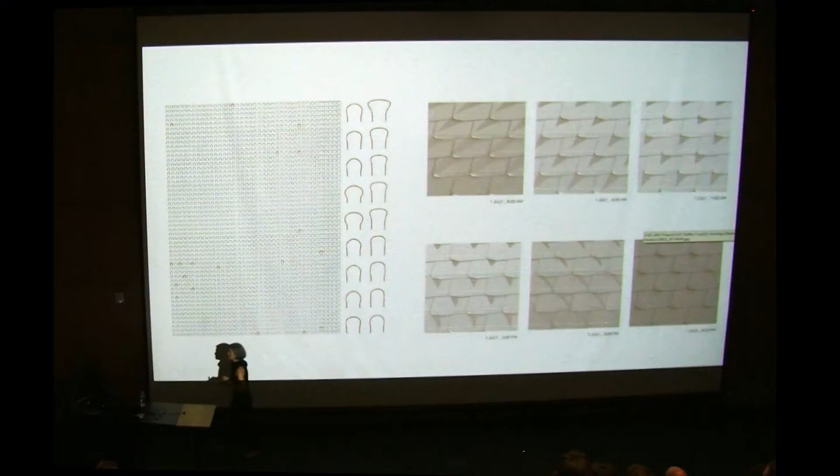So we created this really simple form. We used a script to generate all these profiles and then decided which of the profiles we liked best for our little shed. We used a similar script for looking at shingle patterns—we've been playing with this idea for metal shingles that have a folded corner. For a different client we ended up having to change that cladding, so we wanted to test it out here. It's basically this sort of prickly shingle pattern. This shows the manure box open with these little bent aluminum corners, so that over the course of the day, the building is sort of animated in daylight.

And then it has sort of plywood doors at the end. That's the roost - those are the chickens. And they're very happy.

And then, finally, last project - we just opened the stadium. Big building, our biggest building that we've ever done. And this is not it, but this is the existing stadium, existing press box at the University of Cincinnati.

Nippert Stadium is this beautiful historic bowl stadium in the center of their campus. They have an urban campus, it's very dense, and it is literally a petting zoo of architecture.

Michael Graves, Morphosis, Tschumi, Gwathmey Siegel - all of these buildings on top of each other. So our challenge was to create this addition to the stadium to provide club level loge seating and suites, a larger press facility, and a new concourse to connect to the east side within this really dense context.

You can see here our sliver is inserted literally 8 feet from Gwathmey Siegel, and 8 feet from Tangeman, which is the student center, along this artery that is actually full of utilities and duct banks for the school.

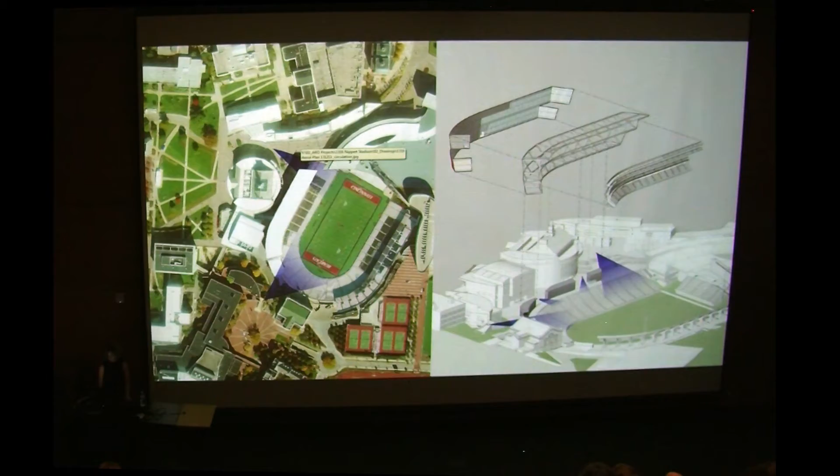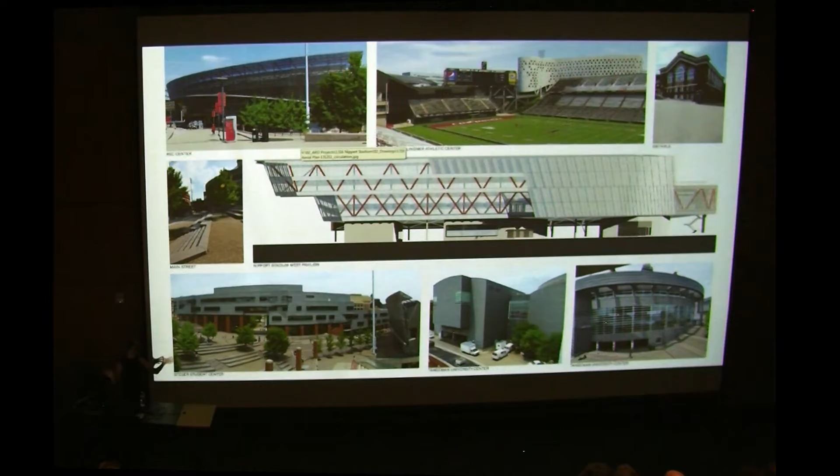So this shows you a little bit of that context - some historic buildings, the Morphosis at the top, Tschumi, and our desire to create our new building with a kind of quieter facade in this context of all of this architecture. This is the section.

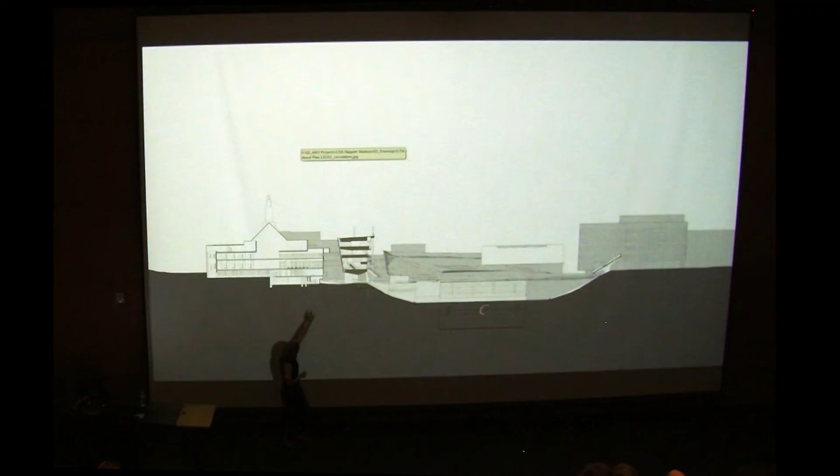You can see how it lifts up, how close it comes to the student center, and then how the bowl kind of rolls down underneath it. So it's lifted so that you can go right up and see the green, and our rendering, and then that's game day.

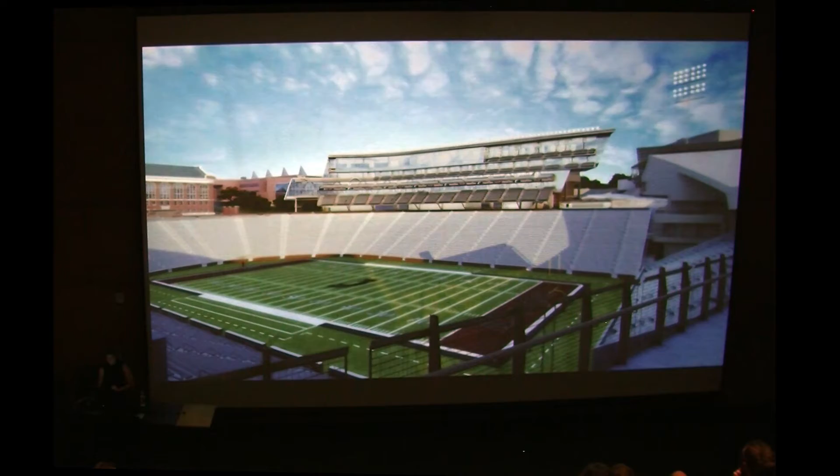These are pictures that my partner Stephen took. We haven't had this photographed professionally yet - from the game, the building wasn't quite done. They're finishing some of the fins on the exterior, but it's pretty great and amazing to see it occupied for this kind of exuberant event. Everyone was very excited.

This is showing the bridge. You can see the glazing isn't quite finished - there are fins that wrap the outside there on the left that aren't installed yet. And one of the center club level spaces.

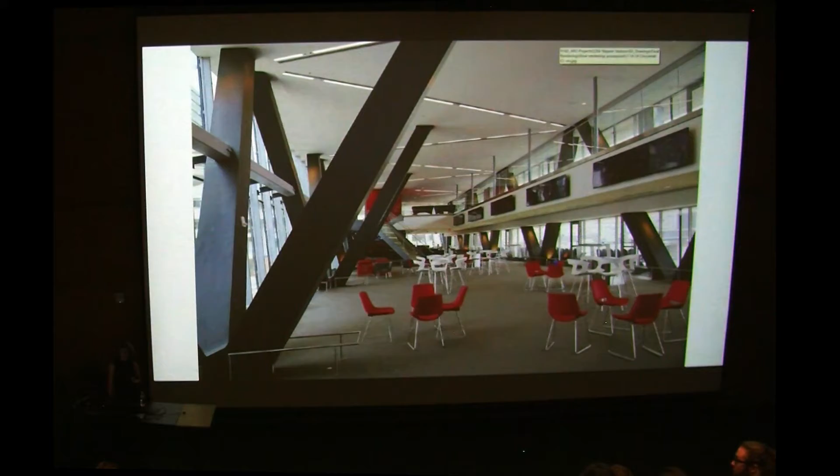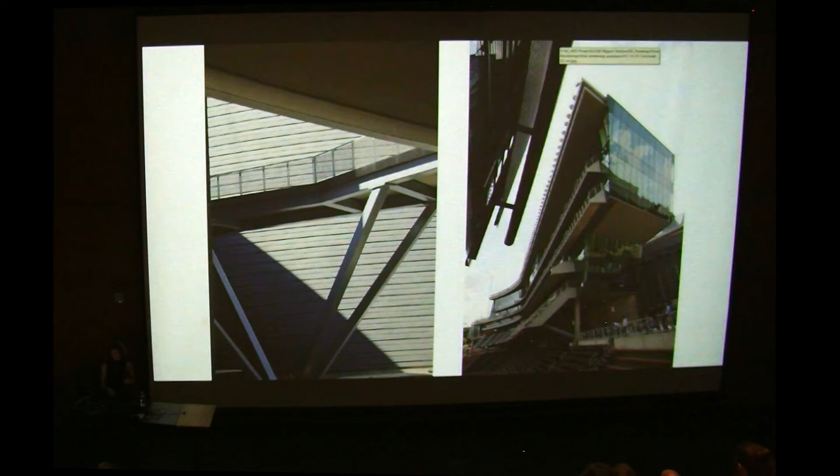But this is that point that hovers above Bearcat Plaza, which you can see here in the middle. So students gather there on game day, and they gather there every other day of the year too. It's sort of a really nice point where you can still see all the way through the building.

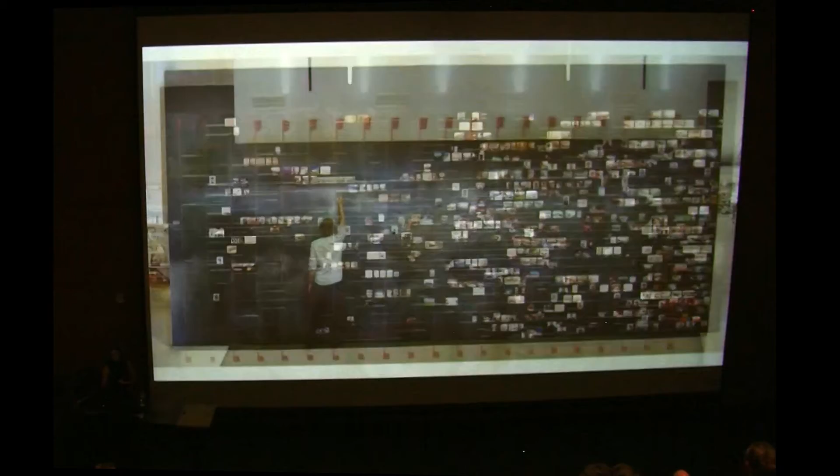And that's it. I just wanted to end by saying - I mentioned we're about 22 years old. A few years ago we asked John for pictures, and I think we got pictures of the kids, pictures of people in the office, and we made this wall in our office to celebrate our 20th year anniversary. On one side we showed all of the projects we've done over 20 years of practice in New York, and on the other side we showed pictures of every person. You could tell when we were pre-digital.

Every person who'd ever worked in the office - I include this and end with this just to say that for us, the most important project in our office is the office itself. We constantly talk about what we're doing, how we're making things, who we're collaborating with, how we can do it better, and how we can promote the kind of studio and place that you want to go to and work at every day. So the office project is the most important one we have, but it's the facilitator for all the other great and fun things that we get to do. Thank you.

I'm not sure what my question is, but I'll try to come up with one. The Donald Judd building—did you say you took apart not only the cladding on the structure, but also parts of the structural system?